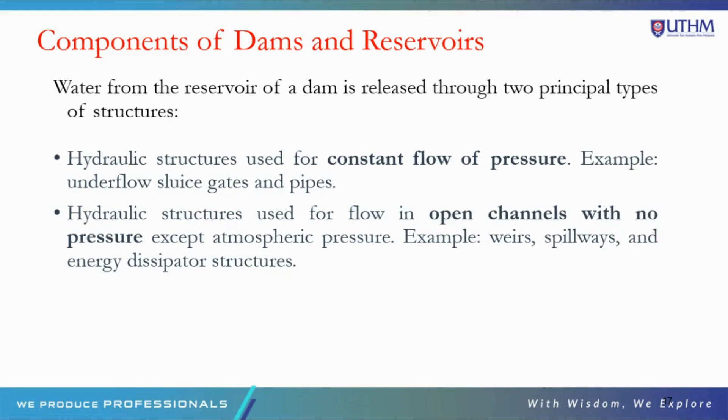We continue our chapter 4, part 2 for water structures, about the components of dam and reservoir. The learning objectives for this topic are to identify the hydraulic structures of the dam and to design one part of the principal structure. The components of the dam and reservoir include hydraulic structures used for constant flow under pressure, and hydraulic structures used for flow in open channel with no pressure. So the dam and the reservoir release through the two principal types of structure.

So this is a sluice gate. A sluice gate has pressure, and this is a type of weir. There is no pressure here, so this is open space. So this is constant pressure and no pressure here. These are the two principal types of reservoir and dam structure.

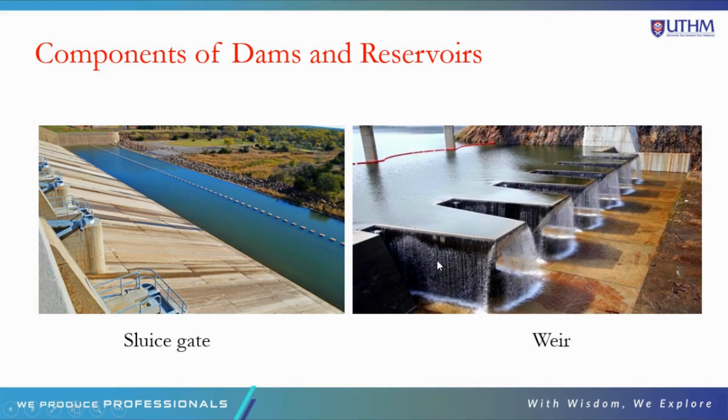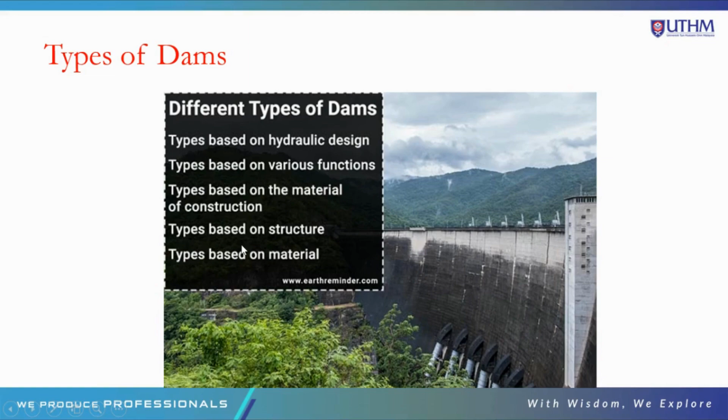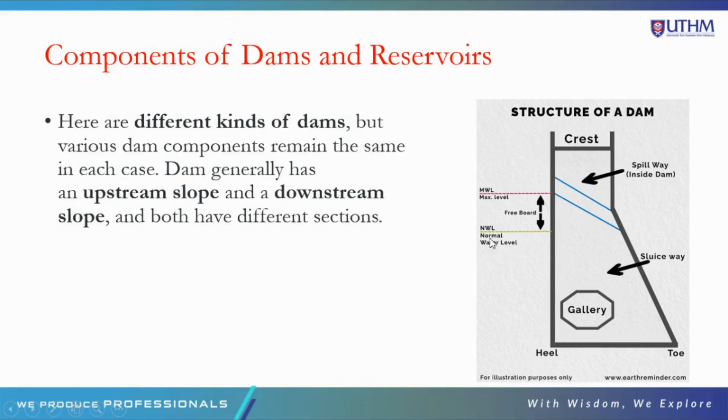Okay, we consider the types of dam. Usually, the different types of dam are based on the hydraulic design, on the various functions, on the material of construction, and on the structure. For the components of the dam, there are different kinds of dam. A dam generally has an upstream slope and a downstream slope, each with a different section. This is a cross section of a dam structure: the crest, spillway, sluiceway, and some gallery here too. This is the water level of the dam.

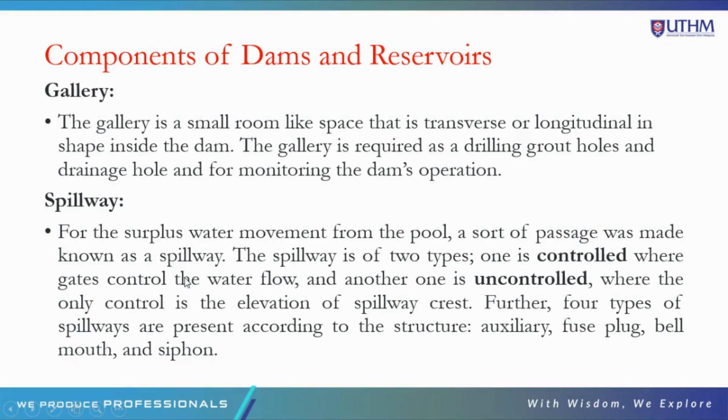The components of a dam are the crest, parapet wall, gallery, and spillway, which is very important for the dam. Spillways can be controlled or uncontrolled; then freeboard, the storage level, and the diversion tunnel. For the two principal structures of the dam, we focus on the spillway. The spillway provides for water storage and releases surplus water or flood water. There are outlet works, which we call a conduit. The outlet works are like the sluice gate, and the conduit goes through the embankment dam.

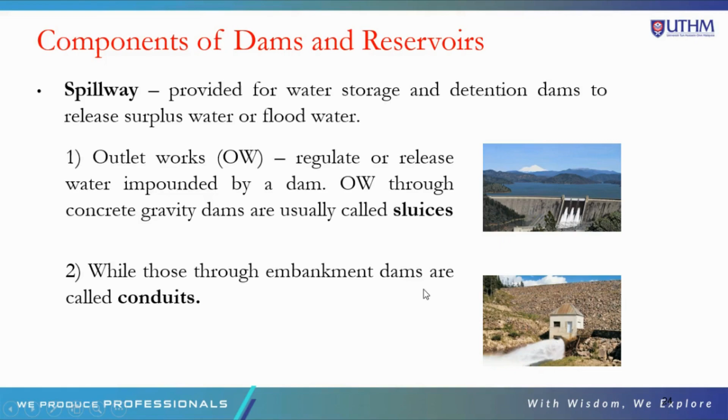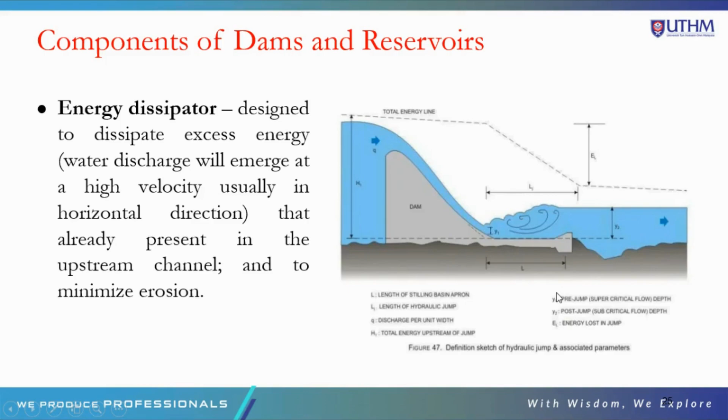And then the energy dissipator. This is very important to release the pressure. The energy dissipator is designed to dissipate excess energy. There is high velocity here, so this is the area of the energy dissipator after the flow. For this topic, we can design the energy dissipator for this dam.

Now we go through the spillway. What is the spillway? A spillway is built in a reservoir to allow water to flow safely downstream when the reservoir is full. The spillway capacity must accommodate the maximum design flood. Some spillways are shaped as rectangular concrete, designed to connect the upstream and downstream regions of the weir. The spillway is located at the top of the reservoir, and there is a bottom outlet with a valve or gate which may be operated to release the flood flow.

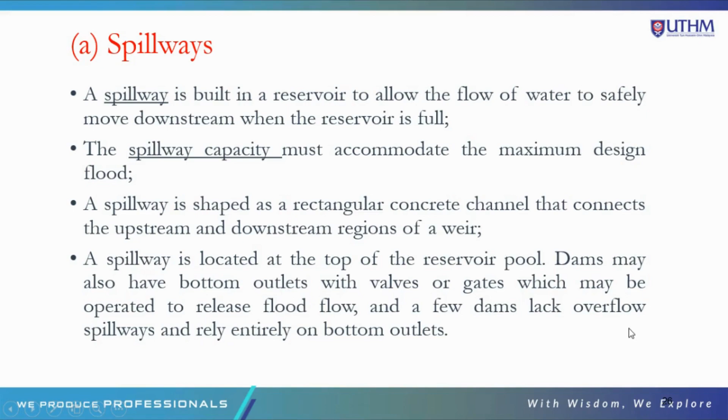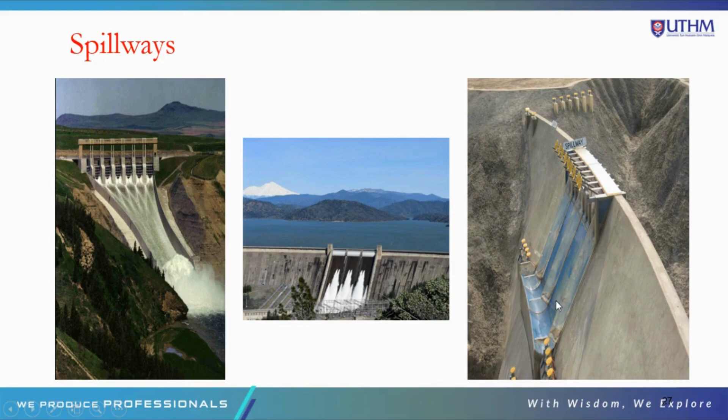This is a spillway at the top of the dam. This is a cross section of a controlled spillway, a cutaway cross section. In this example, the hydraulic jump occurs here, and then this is the Stilling basin with tailwater, the different bays, and the spillway crest and flow.

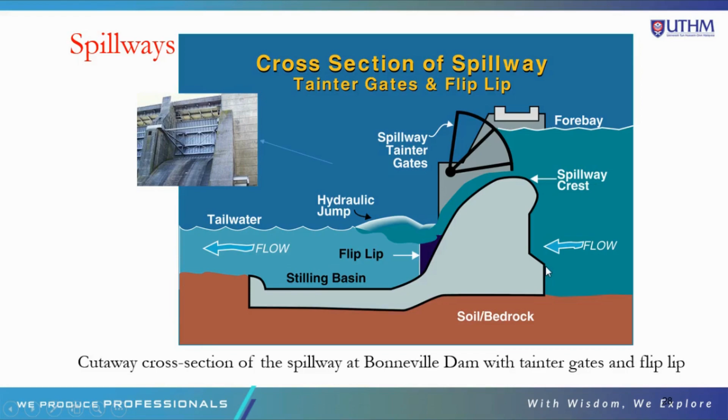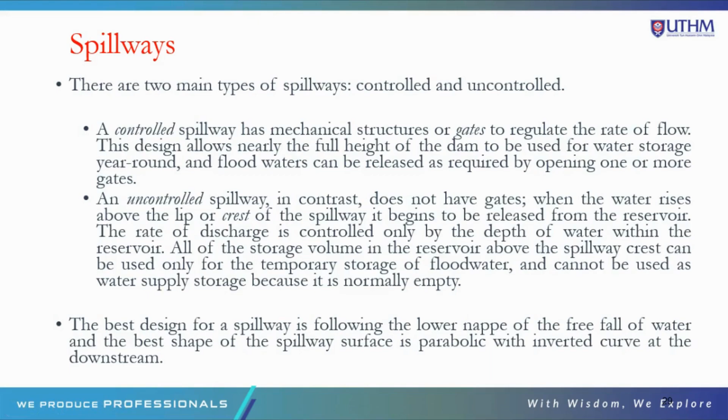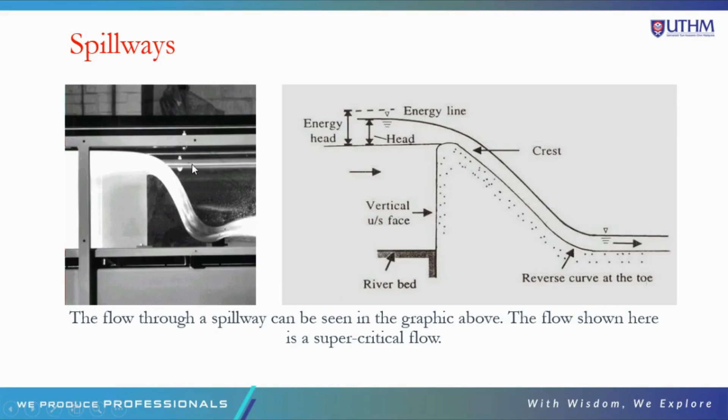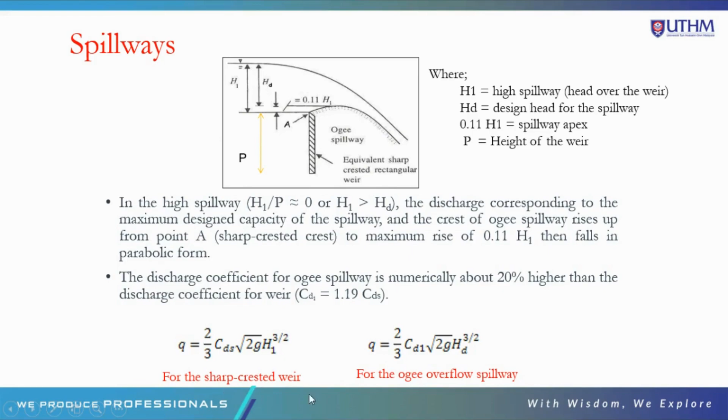The two main types of spillway are controlled and uncontrolled. A controlled spillway uses mechanical structures or gates, but an uncontrolled spillway has no gate; the release is controlled by overflow. The best design is based on the requirements of the type of dam. This is an example: the ogee spillway type. There is an equation for each type, based on the shape of the spillway.

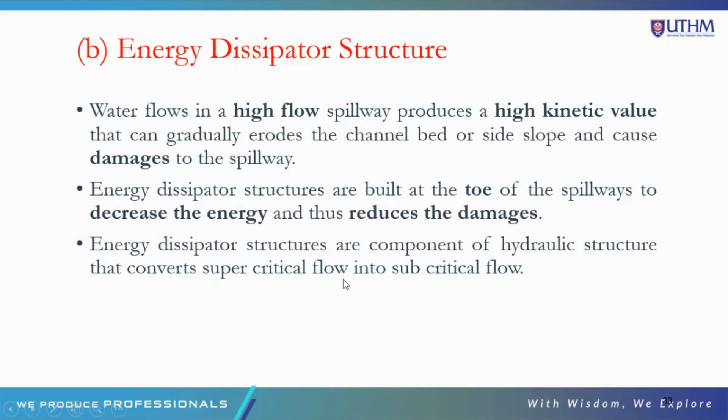The second is the energy dissipator. In this structure, water flows at high velocity, so the spillway produces high kinetic energy. The energy dissipator decreases the energy and reduces the damage at the toe. This is very important, to convert supercritical flow to subcritical flow.

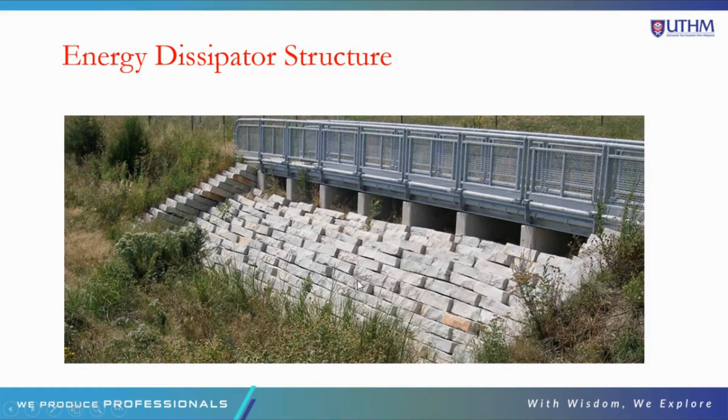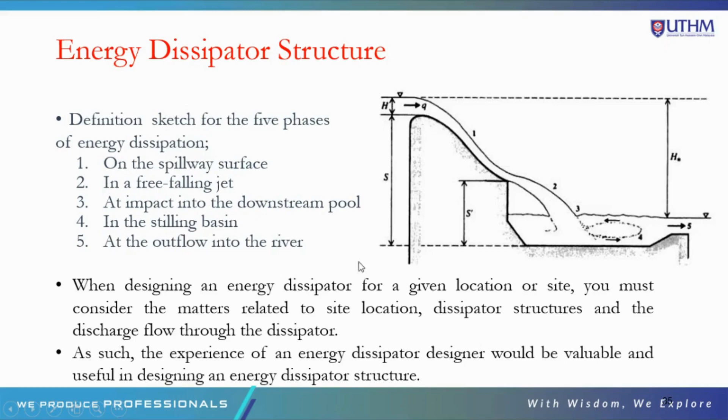This is an example of a very simple energy dissipator structure. Water comes from here, falls, and this is some information about the dissipator. This is an energy dissipator structure at the toe, outside the dam. The water falls here and the energy is released here. This type of energy dissipator we call the Stilling basin type 3, since it has three structures here.

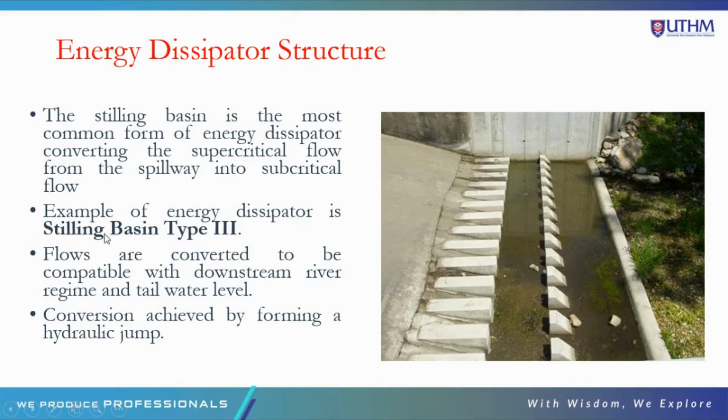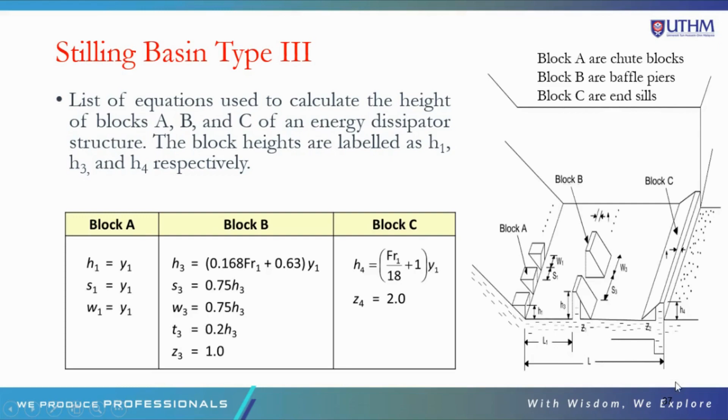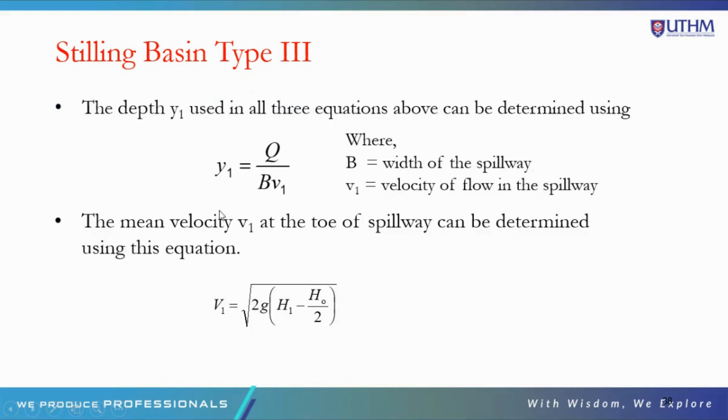These are the equations we need for the design of the Stilling basin. For block A, the row of block A, we use this equation; for block B in the middle, this one; and then block C at the end of the structure. We design these blocks and calculate the length and size of the structure. This equation uses the basic y and velocity at each y, so we need to calculate the parameters y, L, and so on.

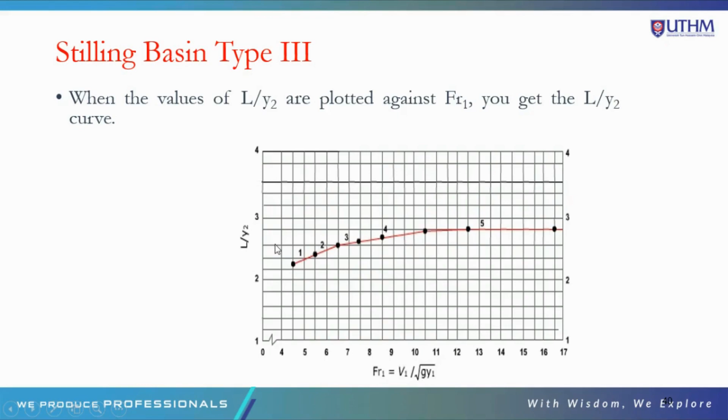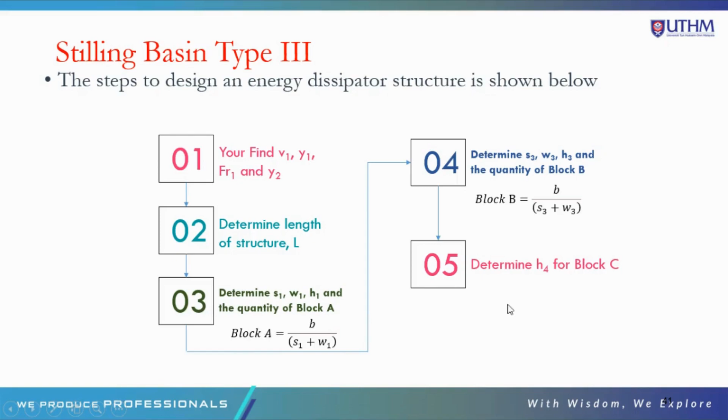This is a graph of values for the Froude number, which we can use to identify the value of L over y2. This is a very simple design procedure for the Stilling basin. First, identify velocity, y, and Froude number. Second, determine the L value, the length of the structure. Then identify block A, block B, and block C. Finally, sketch the design of the structure.